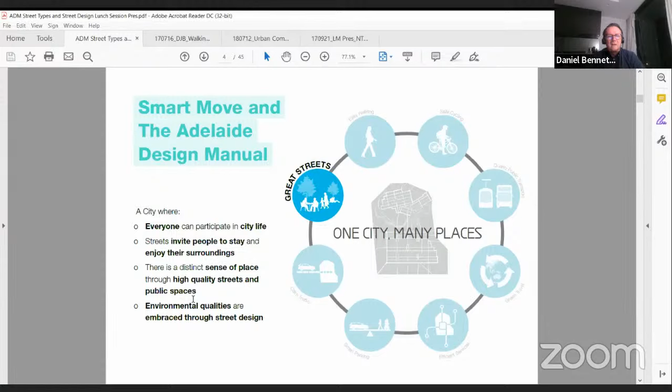Streets - one of the things I learned very strongly working in local government is that streets really are the most democratic of spaces, and they're very precious. We want people to stay, we want people to use them. They're really the glue that holds our society together in many ways. There's a distinct sense of place through different types of high quality streets and public spaces, and with climate change now well and truly here, environmental qualities are so important, especially in a very hot place like Adelaide.

In summer, our average temperatures—a couple of years ago we had 2-3 weeks of temperatures above 35 degrees Celsius, and we're getting more of them.

Out of that transport strategy, this strategic direction was to establish a framework for creating great streets for people. Like many cities in the Western world and other places, Adelaide has 2 reports prepared by Jan Gehl, the urban designer, and this manual was built on the back of those 2 reports, I think from 2001 and 2011.

So again, a suite of interesting chapters. Here's a picture in the background of one of our central city spaces, Victoria Square, and the town hall just behind this quote. Part of what we were trying to do was tell everybody, using quotes and inspirational things from people, to help promote the manual.

So a street—anonymous quote here—'street is a spatial entity and not the residue between buildings.' The buildings are the guests, the streets are the glue.

Back then, you've probably heard of Link Place, a guide to assessing movement and place through our cities. We were one of the early jurisdictions to look at that, and we used it as an early way to help define our streets.

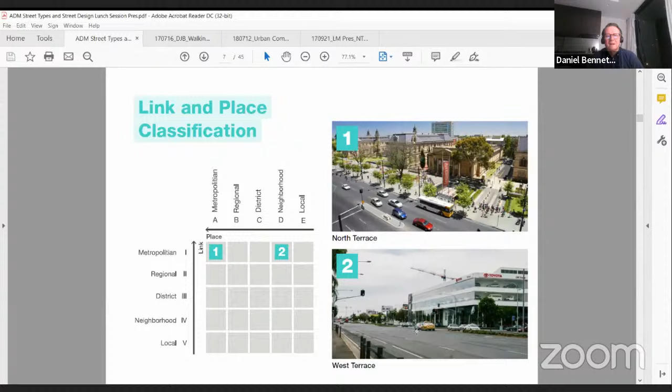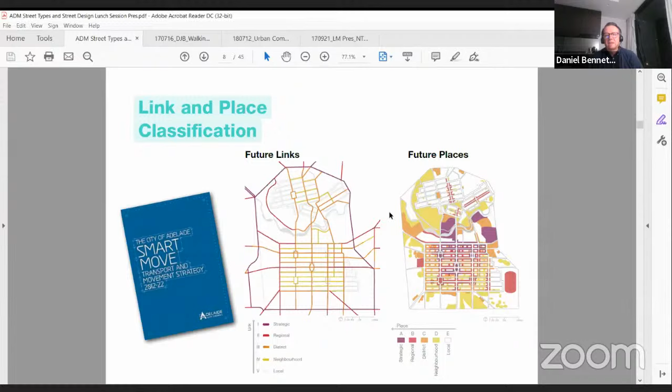Again, you can see the city plan here—there'll be more in some of the other presentations. Just to orientate you, this is the Link and Place classification, with the CBD here. We've got a river coming through the middle, a very leafy North Adelaide suburb on this side, and the rest of Adelaide sprawling out to the coast on this side and the hills on this side. This maps the Link Place classifications we use to help define our streets.

You can see from this plan that it is a very planned city with a strong grid. We've got a series of squares—5 squares in the CBD—with Victoria Square in the middle, and King William Street as our central civic boulevard, with North Terrace at the north, which is the one you saw a picture of a minute ago. There's also West Terrace, South Terrace, and East Terrace, and a whole lot of other streets.

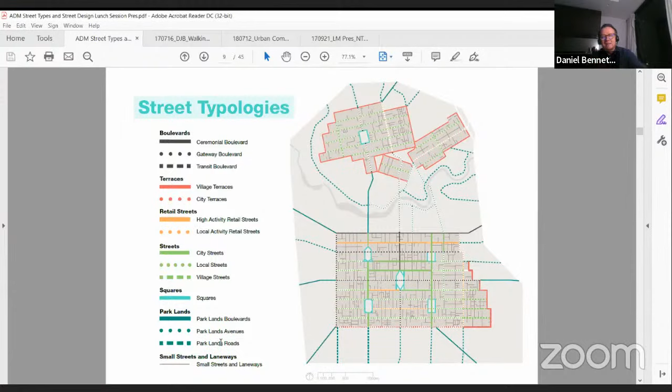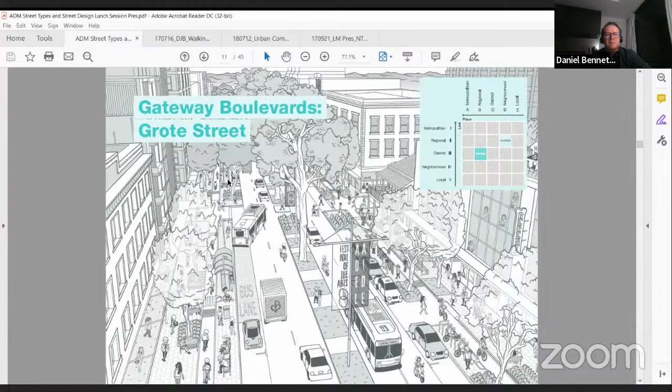Adelaide, like many cities around the world, has rediscovered its laneways, and I'll show you some examples. Another main street through the city, Grote Street, is one of the wider gateway boulevards. Part of the ADM was to realise and use the buildings that people recognise, but layering over them the things that make up the street.

These lovely cartoons show separated bikeways, bus stops, a focus on public transport, and medians with large native trees. Our majestic eucalypts are a signature tree in Australia, and increasingly they're being used more and more as street trees after many years being in the wilderness, literally, so to speak.

Two local streets - this is a small street in the city south. In South Australia, we don't use a lot of zebra crossings. It's a peculiar difference between the Australian states - local regulations never permitted zebra crossings here. In New South Wales, Sydney, Victoria, Melbourne, they're normal, but in Adelaide they're not. So this was the first one.

And this is again a cheaper device with some landscaping to help slow traffic and allow people to cross in some of these smaller, narrow, quieter streets.

The guidance for Gilbert Street shows that we have a lot of older buildings with verandas that hang over the street, and a lot of these protuberances or build-outs for outdoor dining. Parklets were a very big thing about 10 years ago - you might remember those, or have some where you are. Our intent was not to have parklets as temporary things, but to turn them into permanent public spaces. There's a lot of that in our manual here.

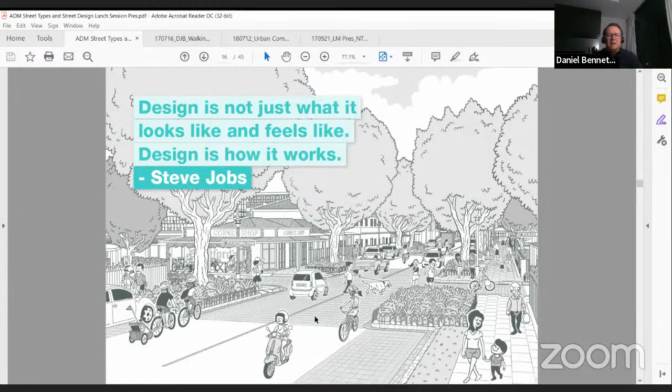A more traditional approach to people-orientated street design. I've been a big proponent of saying things like people walking, people riding bikes, people in cars, people in buses or trams, light rail or trains - because people are the common thing there, as opposed to motorists, cyclists, public transport users. It's really important we put people at the top of this pyramid.

So people walking, people on bikes, public transport and vehicles in terms of movement, and then other things like lighting, trees, public infrastructure, landscaping, outdoor dining, and on-street trading. We encourage that - we've got a very proactive outdoor dining policy, I think still very inexpensive to get a permit. We very much focused on removable furniture, not fixed furniture, so people can put things away at the end of the day and the street becomes useful for others.

Parking and loading - servicing our cities is increasingly an issue, you may have the same issues. And then other things like water sensitive urban design, which is incredibly important in a very dry city like Adelaide. Adelaide is the driest inhabited city on the driest inhabited continent, which is Australia - I think we get an average annual rainfall of about 0.5 metre, 500 millimetres, so not a lot of rainfall compared to some other cities.

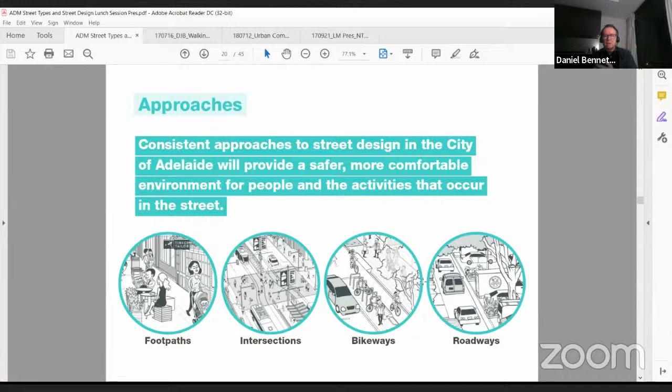The next couple of slides go through different approaches, from footpaths to intersections to bikeways and roadways. If anyone is a member or has the books from NACTO, the National Association of City Transportation Officials, the amazing online guide and books show how to do it. You can see some similarities with the approaches we took. Not a lot of things are original, so we adapted a lot of the thinking from that.

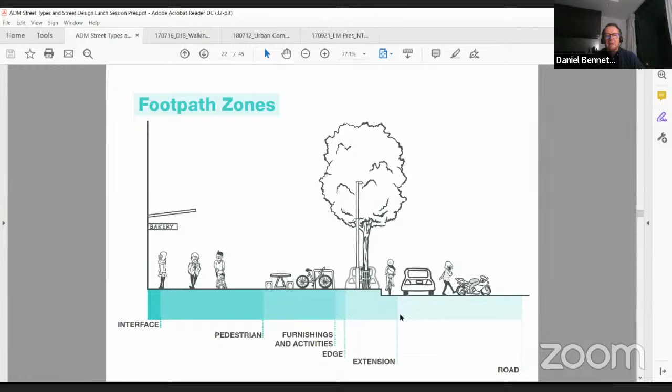Just defining cross sections, the different types of footpath zones, adhering to the UN Convention for people with disability, so we always have a shoreline on our buildings and keep that clear. Very important. Pedestrian spaces, a minimum of 1.8 metres on our busy streets for two people, or groups of people, to comfortably walk past one another. Then, depending on the widths, we have furnishings, activities, and an edge extension where we might have trees, and then everything else.

Some examples of where we've done this on Rundle Street, one of our great retail streets, where we widened footpaths that used to be permanent parking, and instead there's public art, trees and greening, and outdoor dining and things.

Intersections are another important part. Really tightening those radii, because if we leave it to the engineers - no disrespect to all my friends who are engineers - they will design them for 60 kilometres an hour, which is just not appropriate. So we're trying to minimise crossing distance while still making it functional for cars.

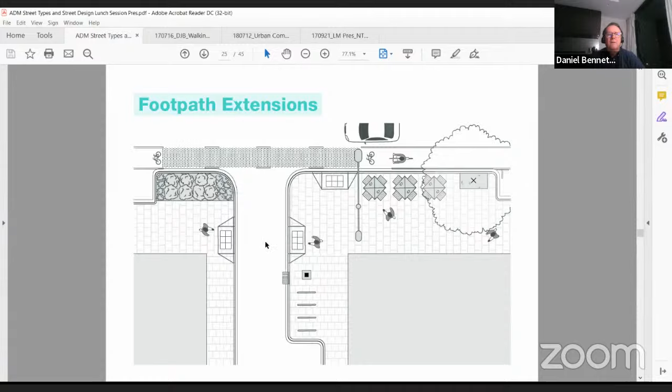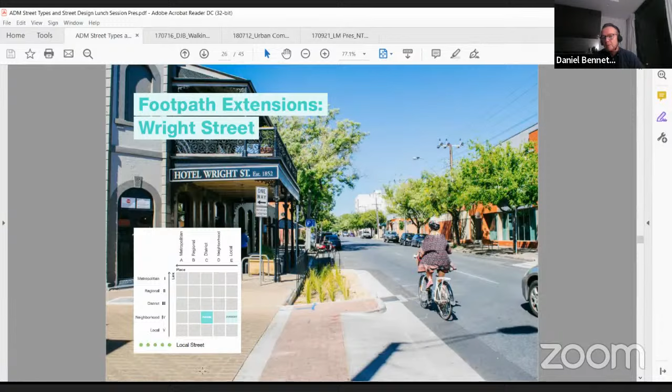We did a lot of these little projects where you can see the small insertions we made to create more space for people and give priority to those walking or riding bikes. It's very rare you'll see anyone not wearing a helmet in Australia.

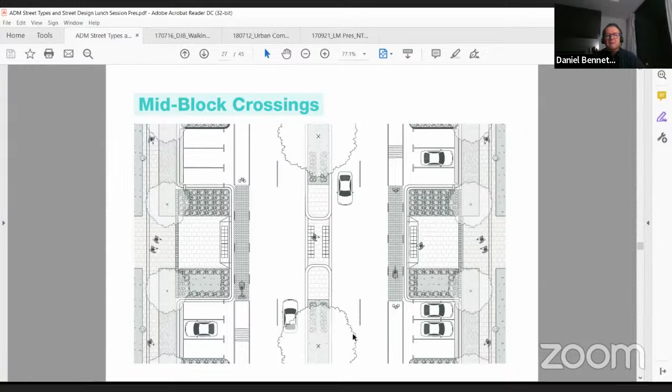Mid-block crossings - we know intersections aren't the only places where people like to cross, so we provide generous spaces for that. We do have nice wide streets, so at times we're able to do that.

I'm sure, like the wider Toronto area and Oakville, you have bikeways too - be interesting to hear about yours. We do have some; at the time of preparing this, we were working on that.

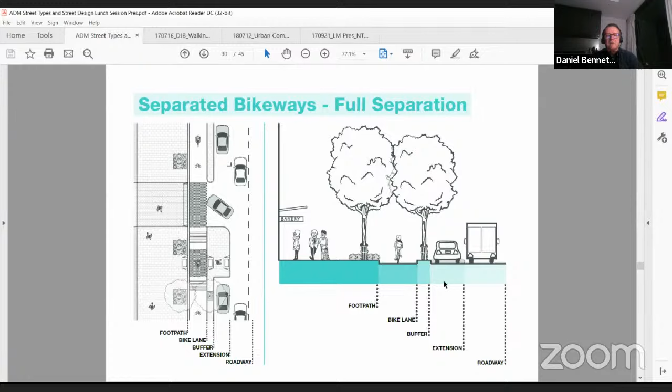Because we've got nice wide streets, our approach was to have single-direction bikeways, one in each direction on either side, not bi-directional ones like they have in Sydney and Melbourne. So we started talking about what that means with buffers, areas for landscape, etc.

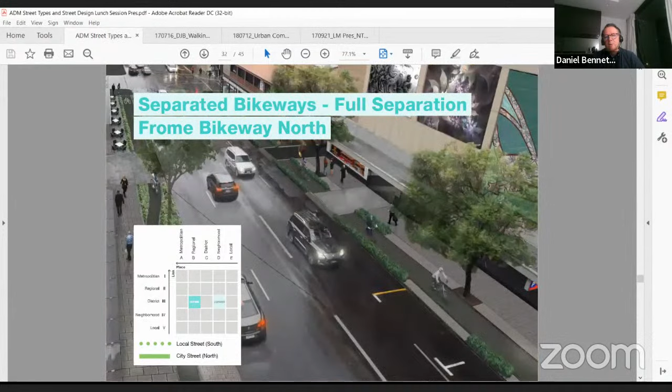This is a very early project of ours where we trialled a separated bikeway on one of our wider streets - very controversial at the time. But we came back and did this properly, which was this project: a complete street renewal, very controversial but also very successful in the end.

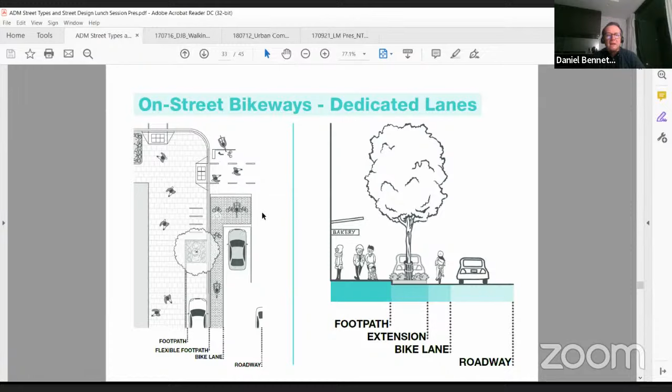We can still have on-road dedicated lanes. We also do things - I'm sure this is an international phenomenon now - where we have green bike boxes at our signalised intersections, which allow cyclists to get a head start when the signals turn green. It was an easy program to put those throughout the city, which we've done.

On some more difficult streets, again, we have the traditional greening approach. Reducing traffic speeds in Adelaide has been notoriously difficult. The average posted speed limit within the city is 50 kilometres per hour, and moves to reduce that to 40 and 30 are still largely unachieved, simply because Adelaide loves its cars, unfortunately.

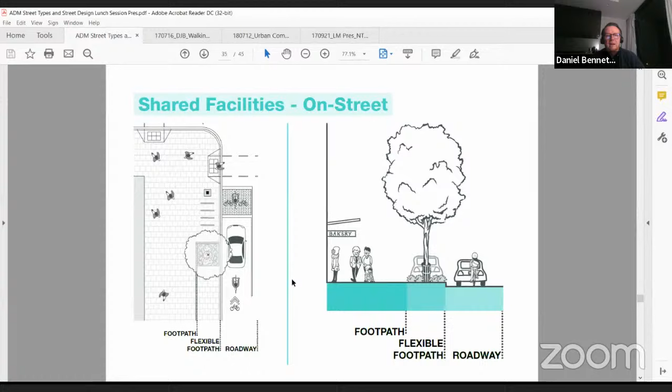But again, keep talking about those facilities, those on-street facilities, and wherever we can have build-outs and make cars guests on any footpaths. We have a number of shared streets in Adelaide. This is one of them, Hindley Street West, University Precinct - a complete street renewal, highly successful in a highly busy part of Adelaide when the uni is in session.

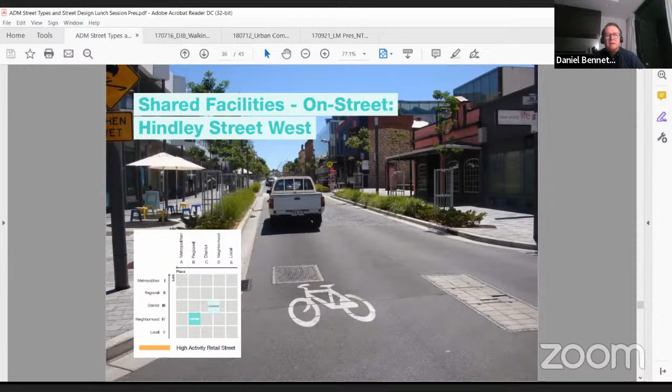And our new hospital is in this part of the city, and this was quite an important east-west street.

We have lots of streets like this, lots of line marking, and line marking to me is a temporary measure, not a permanent measure. I argued with my transport colleagues about this often because they see it as a very cheap way of doing it. But what you find is people after a while don't adhere to the line marking.

This used to be a 2-lane road. This is just before we put in a dedicated bikeway, but people just drive along it anyway. This is a typical condition in some of our unrenovated streets.

I guess the intent is to get some medians where we've got these painted bitumen areas - we need to rip them up and put new ones in, like that example I showed you earlier. We do have quite a few of them, and some, like this Halifax Street, have lovely old industrial buildings and a very established character.

So I guess some of the challenges we found at this point were prioritising people movement and on-street stays in a very vehicle-oriented city. People like to park right out the front of businesses.

Meeting Australian traffic standards - Austroads is our national regulatory framework, and it really does prioritise vehicles. That is changing, it's pleasing to see, but it still does prioritise the safety of vehicles moving.

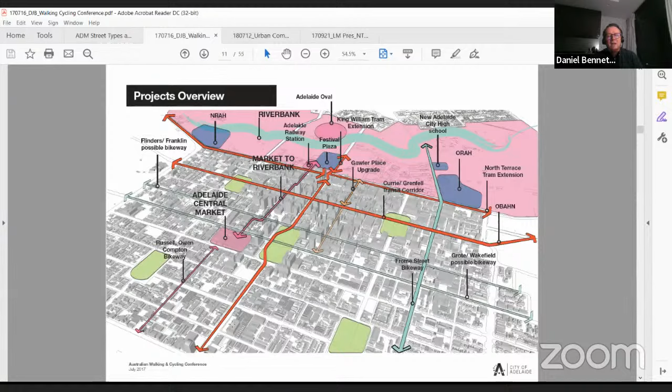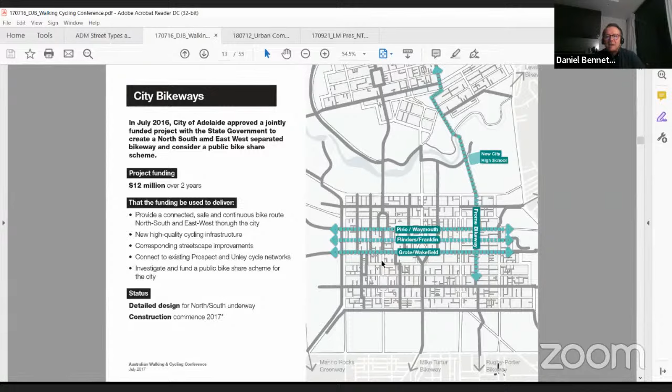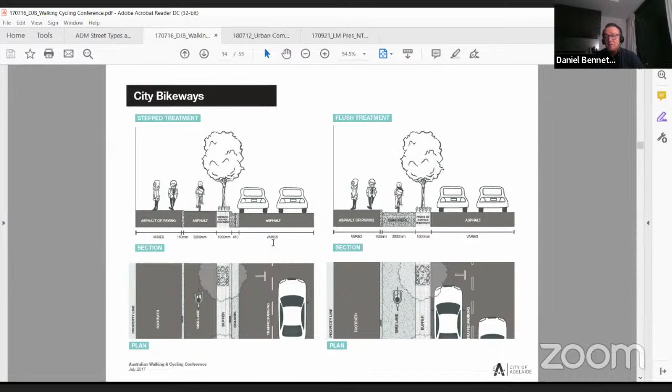City Bikeways was huge at this point in time. This is the North-South City Bikeway, or the Frome Bikeway, that was delivered. There were also options for an East-West Bikeway, which to this day have not been delivered, very unfortunate. We had to go through a process looking at all the options - off the top of my head, about 28 different council meetings and workshops on this bikeway and about 34 council decisions. It was extraordinary. Part of my frustration was that we didn't have anything to talk to.

So this is what we built. We actually got our depot, found some money - about 40,000 Australian dollars - and built a section. What we did with this prototype, which is so important when trying to bring disparate groups together, was show the various treatments we were proposing.

We put landscaping in, built half a street effectively, got some staff to bring in their cars, and had some open days. We got this fabulous service, still going, called Eco Caddy, and got the media down there. We got different groups - property council people, economic development committee people, engineers, landscape architect colleagues in the industry, community members, community groups, and the elected members themselves. We got them to kick the tires, ride bikes, and have a go. It was really successful.

A very small investment showed people we can apply the Adelaide Design Manual materials - curb types, bitumen, separators, different types of curbing, and brick. Red brick is a bit of a material in our residential areas, along with bitumen. I'm a big proponent of bitumen as a relatively inexpensive material. So again, we showed it.

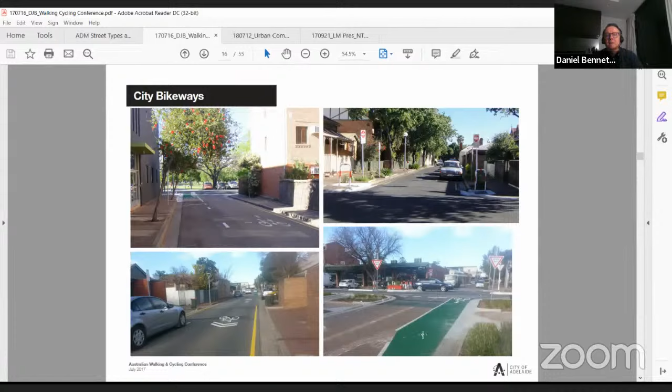This is the low contraflow street I showed you earlier. You've got one-way traffic, but bikes can ride in both directions. At our intersections, traffic's coming this way, so this little green area allows bikes to get across the intersections, following safe Austroads guidance. This is one of those little projects that just happened between the cracks.

The Market to Riverbank precinct was really about discovering - this is the old Bank Street, and this is Adelaide's Central Railway Station here. We have about 17 or 18,000 people a day walking up and down this grotty old street. This is long gone now, and this was one of the primary routes to upgrade.

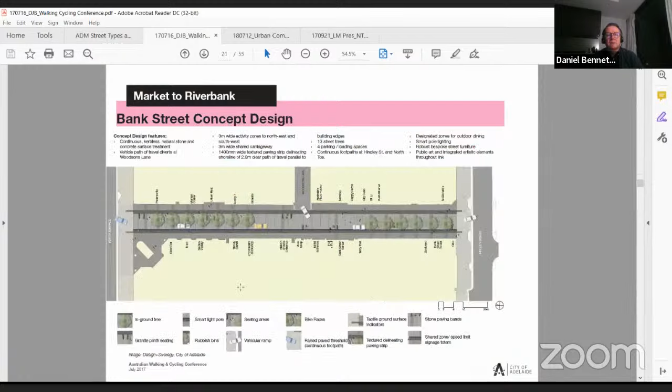We went through the full-on concept design of all the streets, right down to individual pavement types, lighting zones, tree zones - a very granular design. It won loads of awards, which we're really pleased with, including some Australian Institute of Landscape Architects awards, and got a lot of positive press. Part of that was obviously doing things like artist impressions and the like.

I don't have photos unfortunately, but this is about connecting our cultural heart in the central market. The Adelaide markets - you should Google it, it's one of the best places. If you ever come to Australia, you have to come to Adelaide markets. It's an indoor market with fresh fruit and vegetables, but the coffee culture, like Canada, Australia - it's huge. It's a really amazing place to be, the Adelaide Central Markets. This connected that to the riverbank, where Adelaide recreates.

To another street, again a typical inner city laneway with zero setbacks - this project has been finished as well, and it's now a shared street. This is what it was like not too long ago, in 2017.

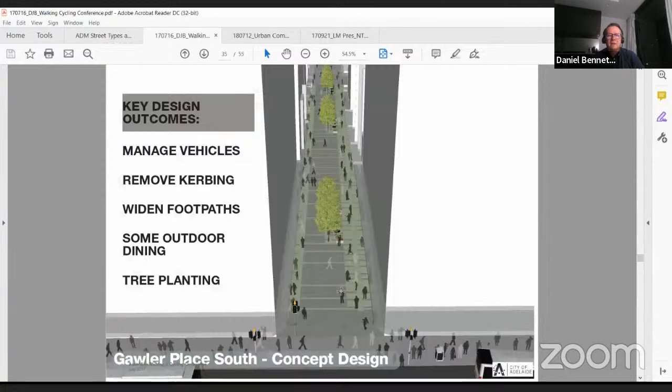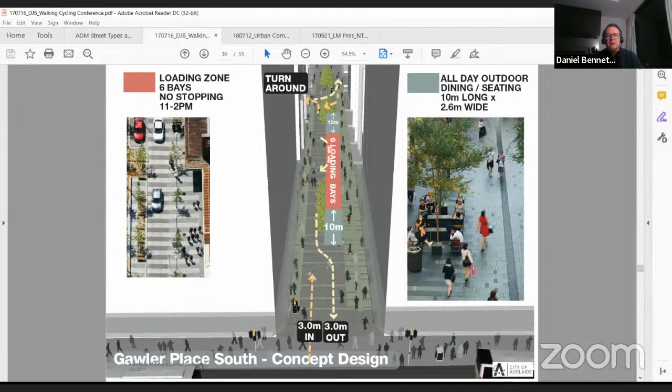We pretty much delivered on this design, and it's been really useful. We've allowed for loading bays. The street is designed to allow vehicles in and out because there is some private entry. These are all practical things we need to allow for: loading bays, short-term parking, but the focus is on sharing the street.

So again, some pretty crude designs. We did all this in-house, by the way, so we didn't use consultants. I had a very large team because we needed to do it internally due to the timeframes involved and the way the council wanted reports and things. So I did bring a lot of this in-house, and it was very helpful.

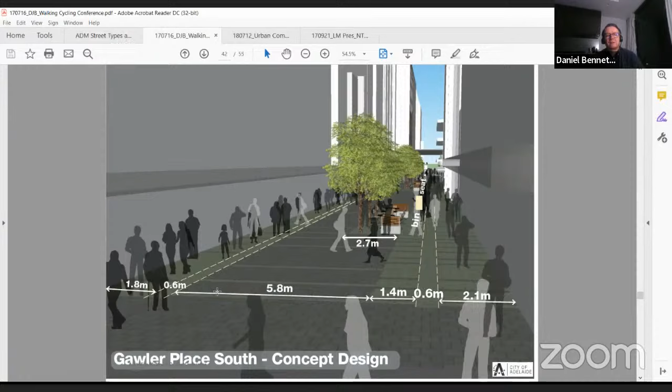A lot of the technical aspects to drainage, widths for services, minimum footpath widths, etc. Pretty narrow street, Gawler Place. A lot of Australia Post deliveries as well.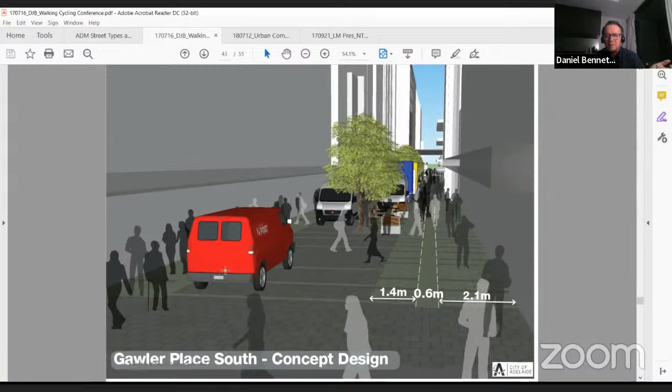Post is one of those services that is dissipating somewhat. I'm not sure if it's the same in Canada, but in Australia, Australia Post used to collect mail from letterboxes three times a day. Now it's every third day. That change in vehicle type movements, because people aren't posting letters anymore, has reduced that sort of service delivery. That's a notion of how things are changing.

A lot of detail on paving design. We wanted to show them that it's really important to delineate various things. I won't go a lot into that, but the development of the design, the iterative process, is so important.

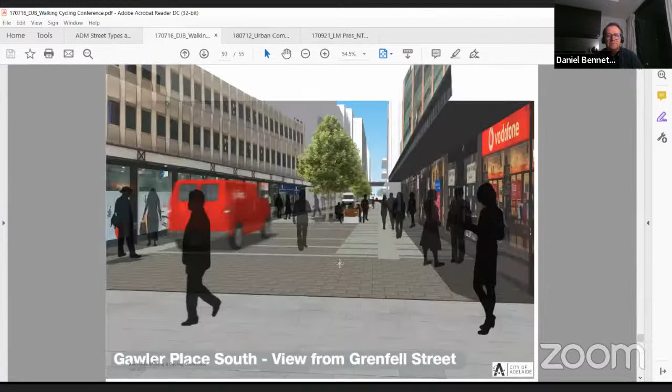So how did we change? One of the things I really like to do is measure quality outcomes. You might have seen at the start the measuring of public domain quality and the number of trees. On these laneway projects, we gained 61% more public space. We went from about 3,000 square metres and nearly tripled that. 7,500 square metres in Gawler Place, again a 64% increase, and on the City Bikeways project, again almost half again. That's a huge increase in public space.

In terms of street trees, our strategy was to target harder streets. In our laneways there was a sum total of 2 trees. I don't think we got 48 in the end, but we got pretty close - I think we got about 35. At the time we had 48. Gawler Place had none; there's now 22 street trees, with connected canopies for our very hot summer lunch times. On the bikeways, again, we managed to get almost 50 more trees in.

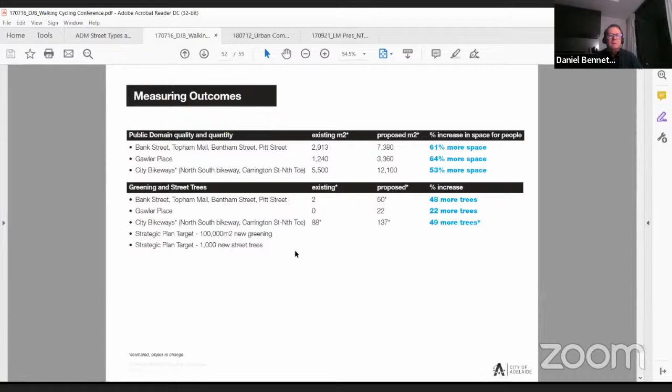The strategic plan target was 1,000 new street trees over 4 years. We got there in a year across the city because we put a major focus on it. That was a very successful strategic plan target. Overall in those 4 years, around about a 60% increase in new public domain. It's an extraordinary amount of public space.

Sorry, I'm talking in metric, I hope that's all right. Nearly 40,000 square metres of new public domain works, 119 new street trees, 2 kilometres of upgraded streets, a new 1.6 kilometre separated bikeway, and at the time a nearly 4 kilometre separated bikeway in the planning stage.

So have we changed? Absolutely. We were delivering it. I'm not sure how much more time I have, Miriam. I've got one more quick one I can share, but I'm also happy to stop and answer any questions anyone might have. Thank you.

Just a quick comment about Jan Gehl - to be honest, he is the inspiration behind this whole Urban Design Talks series. He's definitely my idol. I'm all about designing for people, and I believe his touches all over the world were like magic. He was invited to one of our sessions, and before the webinar started I was asking him for advice, wanting to take as much as possible, and he said just watch what Australia is doing. They're doing something right, so just keep an eye on what they are doing and try to get inspiration as much as possible, because they're going in the right direction. So now when you were mentioning this, I thought, oh yeah, he said that. Oh, nice.

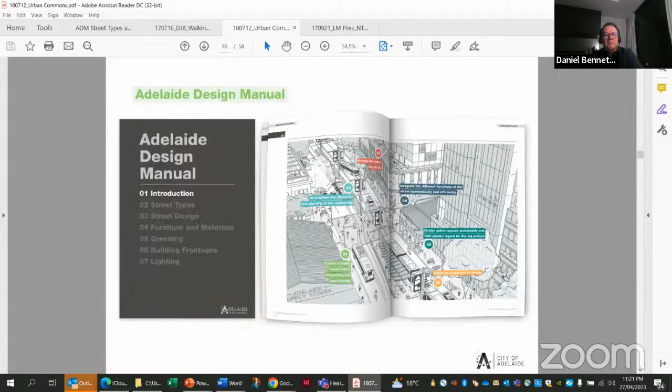You can see we were able to, with this type of approach, highlight the importance of greening on Owen's beautiful illustrations. So just going through the Adelaide context, our strategic plan at the time - the big focus was on being a carbon neutral city, and obviously still is. I mentioned those targets before. Again, the Adelaide Design Manual and its role in shaping the city, regardless of development type or location, and the ability to show the different parts of how wonderful the city is.

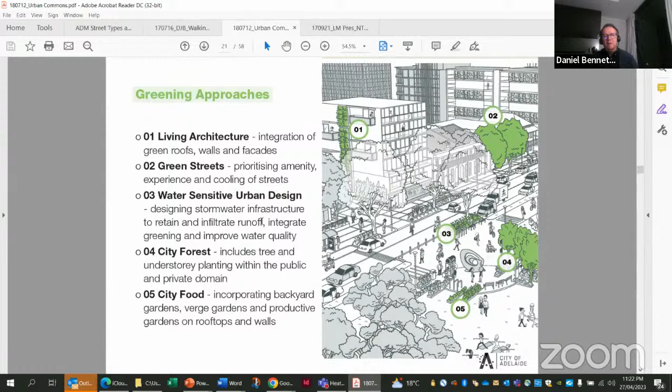From a greening perspective, we are a relatively leafy city, although I think that's not as good as it could be on a world stage. Going through the different greening approaches, from living architecture through to city food - and food is a big issue across the world - water sensitive urban design in particular is really important. We don't have a lot of water for irrigation, so that links to our city forests as well. All of our streets were designed with a palette in mind of trees.

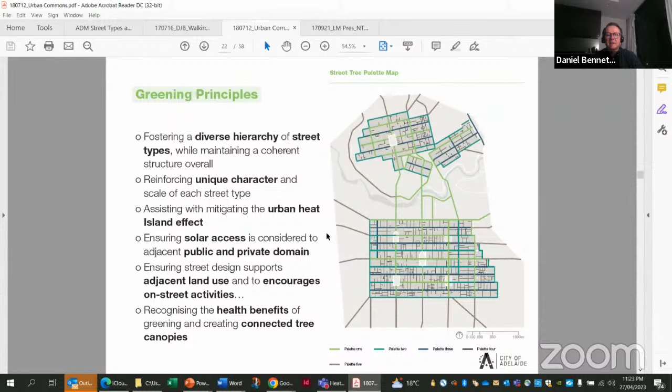Some research that came out of work we did, we realised we had three species of tree covering 60% of our streets. It's a very dangerous place to be from a climate change perspective. I think they were pyrus trees, plane trees, and Chinese hackberry trees - I can't remember the actual species names - but those three species represented 60% of our street trees. Very, very poor way to do street trees. So no more than 10% is our rule of thumb.

One of the things we wanted to explore was getting on with it, learning, adapting, and repeating, so it becomes second nature, and we don't need to worry about things like - there's usually a reason why a tree isn't in the streets, because there's something there. Well, we need to tackle that.

We developed stronger approaches - this probably isn't in the TOD space, this is more around the greening challenges of our streets and public spaces. So developing tree options where standard approaches don't apply, using tree cells underground or water sensitive urban design, the barriers to that including footpaths, services, car parking, etc. Working with planned renewal each year. The actual trees themselves are the cheap bits - it's everything else around it, getting that space in the ground, drainage. We have what we call the NBN, our national broadband network, Telstra is our communications provider, but also things like gas, electricity, and all the things that happen underground.

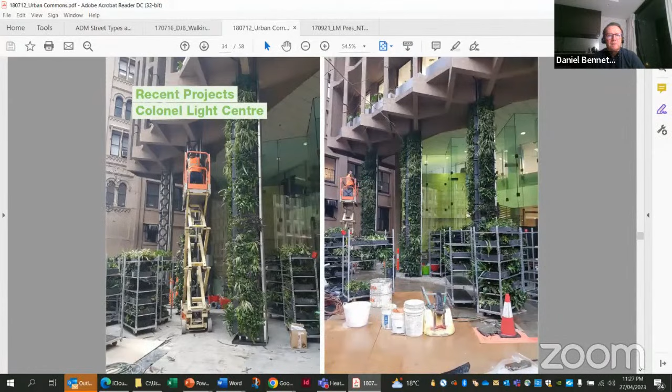So to prove that we were looking at living architecture, things like green walls, we found a small budget and put some green walls on these pillars. Hugely controversial - I got told it was one of my vanity projects.

I got into a fair bit of debate, and as a staff member, when I presented this to council at the time, I had two or three elected members saying this is one of your pet projects. I said, well, you made the strategic plan, elected members, so I'm just delivering on that. The majority of the chamber really loved this project, but there were a few that hated it.

Out of all of that came our Green City Plan, another strategy addition to the ADM. The real focus here was to target streets with less than 5% canopy cover. We realised heat stress and heat-related deaths in Australia, North America and other places is growing with the impacts of climate change. The focus was on residential streets, locations with strategic connections - we've got just one railway station in the city, the main central station, and other routes, plus a very unique busway on concrete tracks, the Adelaide O-Bahn, one of our busiest transport routes. So any streets linking to those things got a focus.

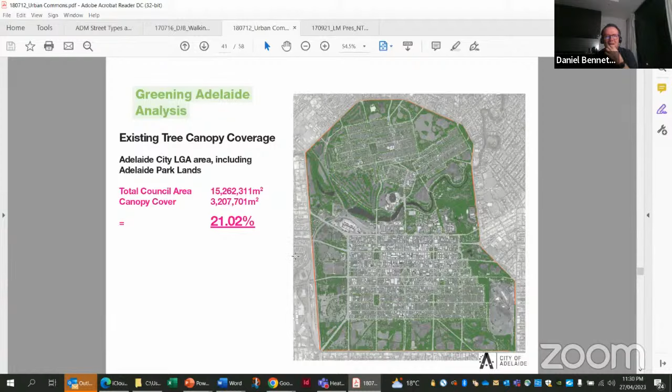Just a bit on canopy cover - this is a lovely image of the belt of parklands that surround the city. If you include the council area, total canopy cover is only about 21%, so it's not huge, and a lot of it's within the parklands. When you break it down by areas of inhabitation, North Adelaide is very leafy at about 34%, the east part around 28%, but this part of the city is less than 10%. It's shocking.

And this is where our new hospital is. So again, the more you measure, the more you can argue for change. This is why a lot of our effort was spent in the northern part of the CBD. South Australia has a target of a 20% increase in canopy cover, so we decided to focus on these areas.

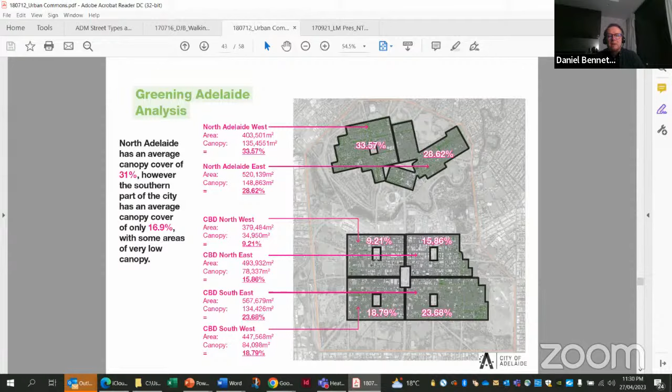So I guess in terms of greening, it's really important, certainly in an Australian context with the hot summers. I think you get pretty warm summers over there too, and a good winter, as I've experienced. But greening Adelaide has some targets - there are global benchmarks and a lot of local data and research.

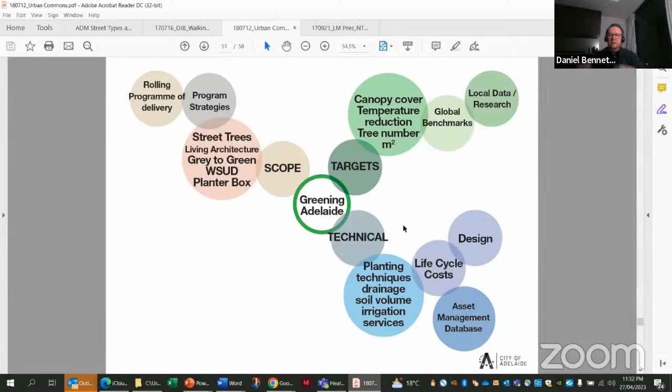There's scope within council programs and budgets to do these things. There's technical benefits and new innovations we were looking at - planting like that example I showed you in Little Sturt Street, with a little garden bed and underground cells. And then there's the community engagement - that's the grants, but also allowing people to pull up a few pavers and put a plant in the ground with a little bit of guidance. That's a really important thing.

So we romped home the 1,000 trees target by 2018 - we'd done that. We also had an additional 100,000 square metre greening target at ground level, which was much harder to achieve. We got a quarter of the way there. So we managed the street trees target, but the ground level one was a lot harder.

That was a presentation we gave to an inner eastern suburbs council, where they were looking at turning a former industrial area into a residential area, and we were telling them all the things we've learned. One of the great things about being in local government is you do share a lot of information with your colleagues around other councils.

So I might stop there for a minute - we might be almost at time, I'd suggest, Mary. Yes, we are. Thank you so much. I had a lot of questions in mind, but time is limiting us, and we really appreciate that it's midday now your time - it's crazy. Thank you so much for accepting that, and as I said, I consider myself lucky today. So thanks a lot.